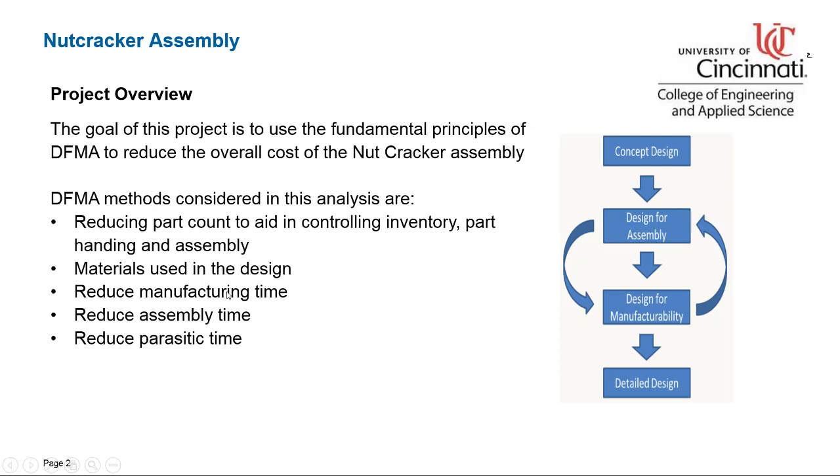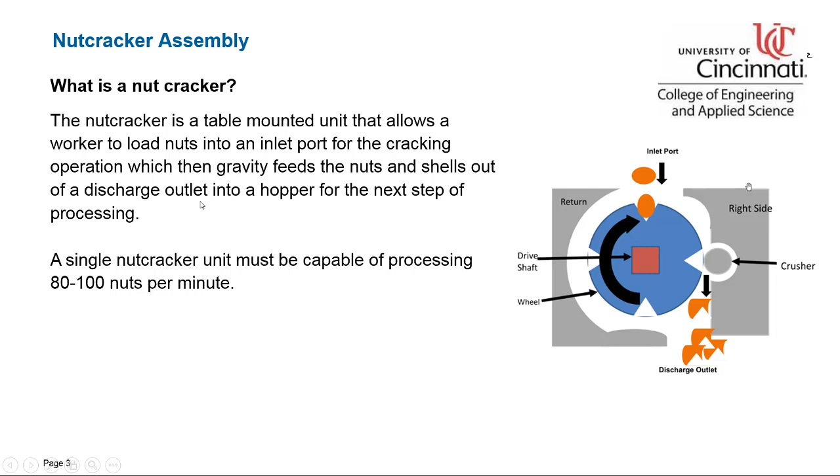What is a nutcracker? The nutcracker unit that I have on the right here basically allows a worker to load nuts into an inlet port. Nuts then get caught inside the crevice of the wheel. It rotates, in this case clockwise, up against a crusher unit, which then cracks the nut, and then the resulting nut and shells are discharged out through the discharge outlet into a receiving bin that then gets further processed. Typical nutcrackers are expected to process 80 to 100 nuts per minute.

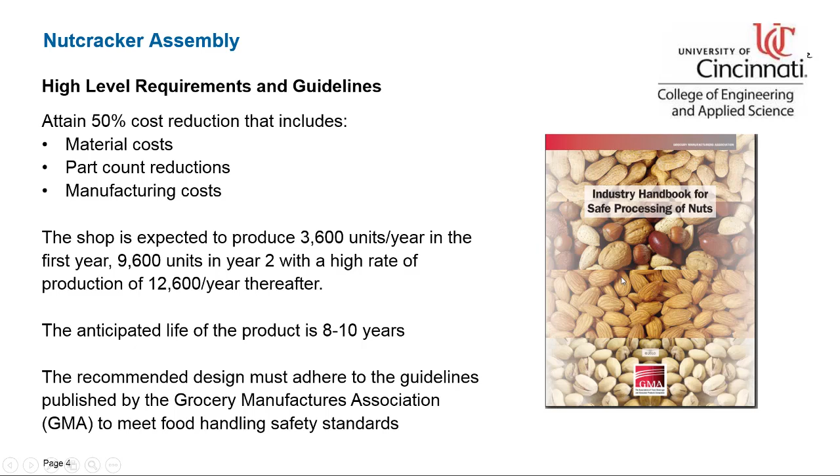Some of the requirements and guidelines that we need to follow for this project: we need to attain a 50% cost reduction. That includes material costs, part count reduction, manufacturing costs, and some associated things that go with those. The shop is expected to produce approximately 3,600 units the first year, 9,600 the second year, and a high rate of production of approximately 12,600 units per year thereafter. The anticipated life cycle of one of these products is 8 to 10 years. Now, the recommended design must adhere to the guidelines published by the Grocery Manufacturers Association to meet food safety handling, and I will touch on that throughout the project.

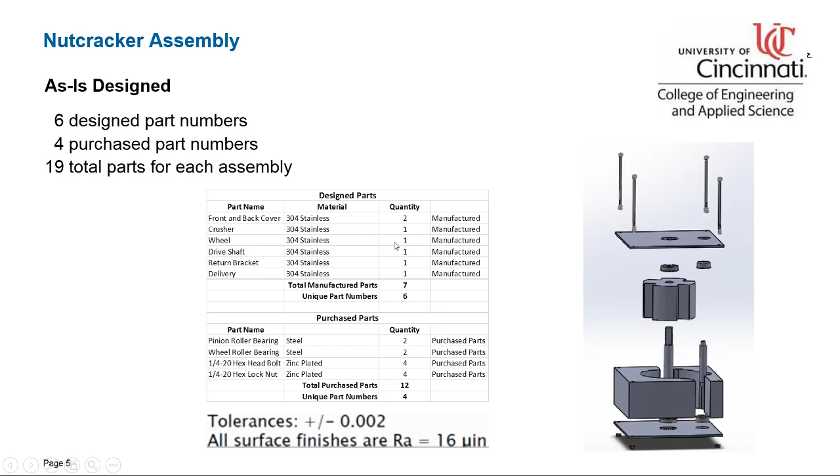Now, there are 2 covers, the front cover and the back cover. They're identical at this point. All of the design materials here are made out of 304 stainless. There are 4 part numbers that are purchase parts. You would have the pinion roller bearing, which is this bearing here and this one here, and this becomes the pinion itself that's manufactured. Then you have the wheel roller bearing at the top and the bottom. Then you have 4 bolts and 4 nuts. Those are all purchase parts. There's a total of 10 unique part numbers and a total of 19 individual parts. Also listed as designed, tolerances are defaulted to 2,000th unless otherwise stated, with surface finishes at 16 microinches.

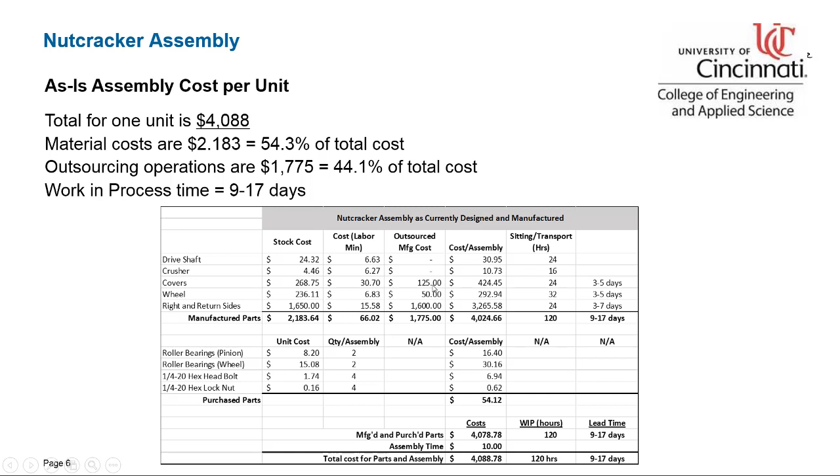Now let's look at the cost per unit. The total cost for one unit is $4,088. That's based off of the actual stock cost, the cost of the labor, which has been estimated through the flow plans, and any outsourcing costs. So you get the total cost of each part for the total assembly. Then you have the purchase parts. It adds up to $4,088. Now, the material cost represents over 50%, which is $2,183. And the outsourcing operations, which are for the covers and the right and return brackets, are $1,775 for 44% of total cost, with a work in process time of 9 to 17 days. That's based on all of the outsourced manufacturing that we have done. So clearly, there's some room for movement along these.

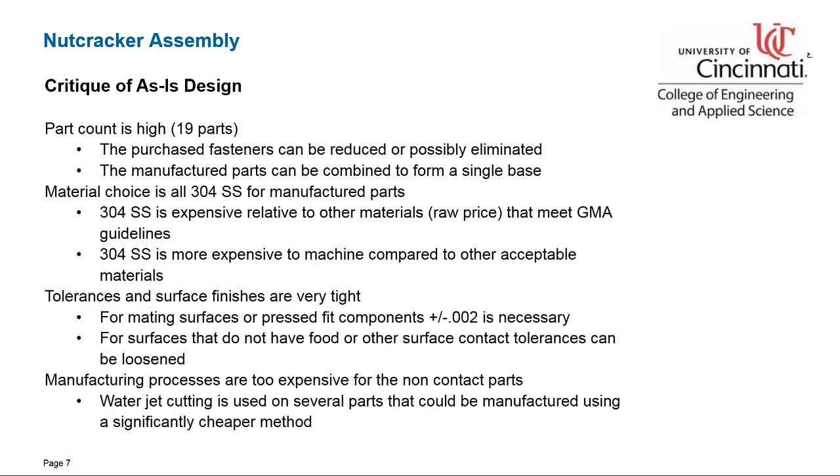Also, manufacturing processes are very expensive. Noted in the process flows, the actual front and back plates and the right and left return are water jet cut, which is a very expensive process that is also expensive when it comes to parasitic time for lead time.

But instead of these being straight from bar stock, then water jet cut, and then all the grinding and milling to get it to these individual pieces, we can actually do a water glass cast on this, and we can drastically reduce the price of this. We'll also reduce the part count by 2, so instead of there being 3 separate part numbers here, we'll have 1 new base plate number.

so we can thumb screw these in. I like this idea temporarily at least because it means I don't need a tool to tighten the nuts and bolts up. I can just thumb screw these in and it takes them out a little bit quicker.

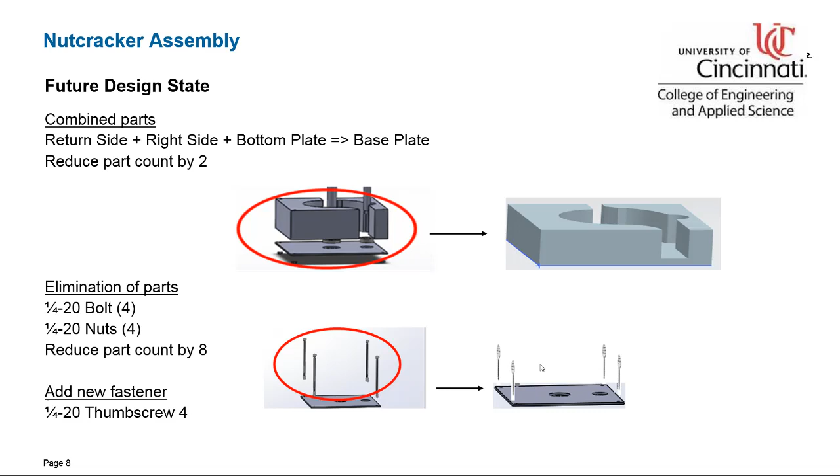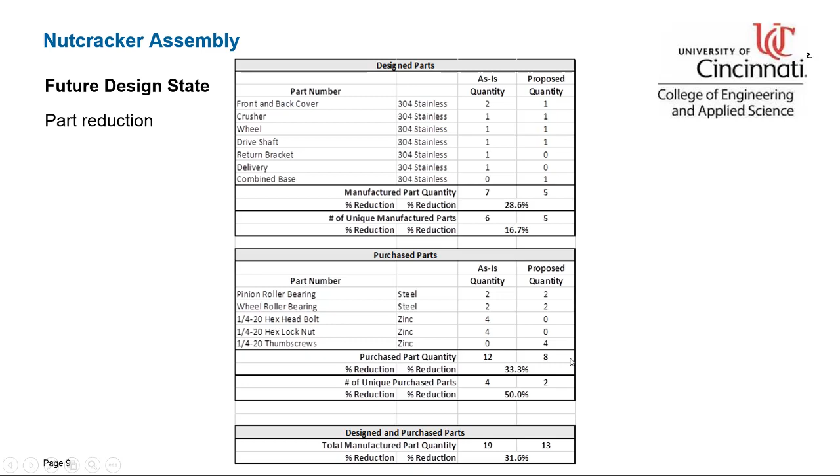On the purchase parts, similar situation. We're going from quantity of 12 purchase parts to 8, 33% reduction. And instead of having 4 unique numbers, we're really just down at this point to 2 unique part numbers. Sorry, that would be a 50% reduction.

The next thing we're going to take a look at is materials. Now, the materials change. This is a little bit of a homework problem. You have to kind of look at a lot of different angles here if you review the GMA guidelines and food safety guidelines. And we can narrow down to the steels, stainless steels, and certainly we could look at aluminum as well. But we look at the 4 candidate steels that I chose, 303, 304, 316, and 430.

And I wanted to kind of do a listing of the Brinell hardness test, manufacturability, and the price. Now, price shouldn't be the only driver. You need to look at a few other things because if manufacturability is very, very poor, then the price per pound is sort of not as big a factor because the machinability is low.

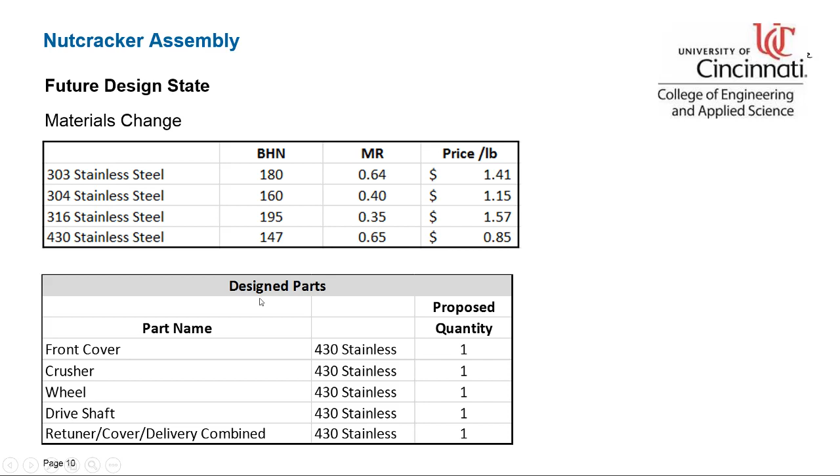After looking at all this, I came to the conclusion that 430 stainless fits GMA guidelines and food safety guidelines. It's got a hardness rating of 147, less than 304, 0.65, a little bit easier to manufacture and work with, and it's significantly cheaper than the 304 stainless. So I think that's the choice to go with initially. So all the design parts, of which there's now 5, we're going to change to 430 stainless.

Now, let's take a look at the manufacturing process. We've combined our parts, we've got our manufacturing parts list, we've got our materials that we've chosen, we know what our quantity is. The next step is I think we have to decide how we're going to manufacture these.

So I think for the crusher, the wheel, and the drive shaft, I don't think it makes sense. These are kind of detailed. There's turning processes on the crusher. The wheel's fairly complicated. The drive shaft has to be turned at a pretty tight tolerance. So I'm going to not change the process for those. But I think on the crusher and the wheel we can actually loosen up the tolerance from 2 thousandths to a hundredth of an inch on each of these, plus or minus.

Now for the front cover and the rear return cover and delivery combined base unit, I guess we'll go with a water glass cast mechanism. So we'll do casting for these. These are per part castings. We don't need to create a die cast for this.

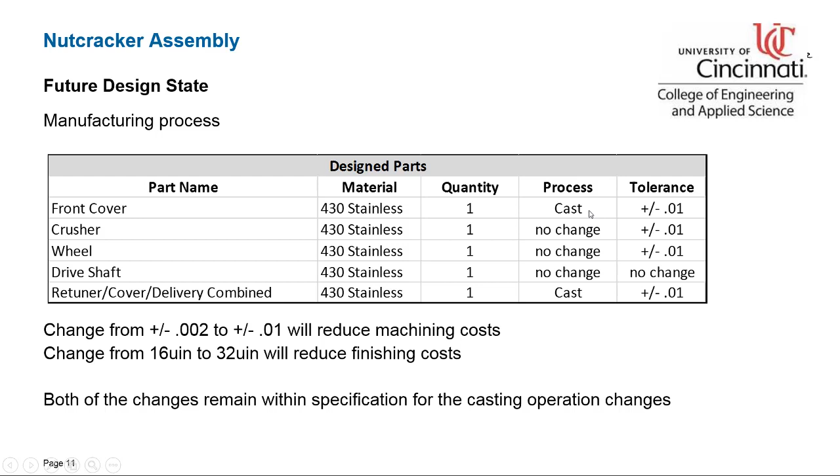And I can cast at a pretty high rate of production. This is a pretty common process, and this casting is really going to drop the cost down quite a bit. So effectively, we're going to go with casting for the front cover and the return cover delivery combined base unit. And we're going to reduce the tolerance from 2,000th to 100th, and we can also change the surface finish from 16 to 32. Again, for this casting process, 32 is perfectly acceptable.

Let's take a look at our cost here. Now that we've decided how we're going to work with this, the total savings for the redesign of the nutcracker assembly is approximately $3,574, which represents a reduction of 87.42%. It also reduces our parasitic time from 9 to 17 days down to 3 to 5 days, taking it down by 6 to 11 days.

This is pretty dramatic. So the unit cost now to produce one of these is approximately $514 per unit. Again, that's an 87% reduction in cost, which certainly meets our high-level requirements.

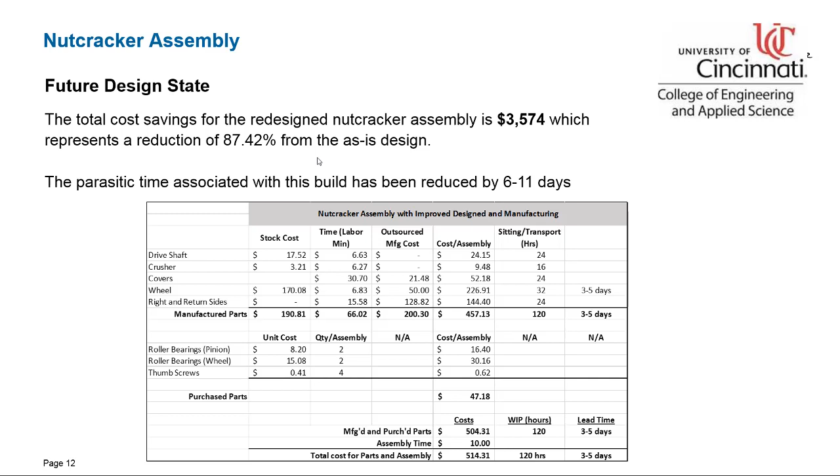I think the next thing we want to look at is changes to the shop floor layout. Since we're not doing so much grinding and milling, I think what we can do is have our incoming parts, the purchased parts and the outsourced parts, come in. They would get held in inventory until they're needed. But I want to open up the shop floor a little bit so that parts could go straight to assembly.

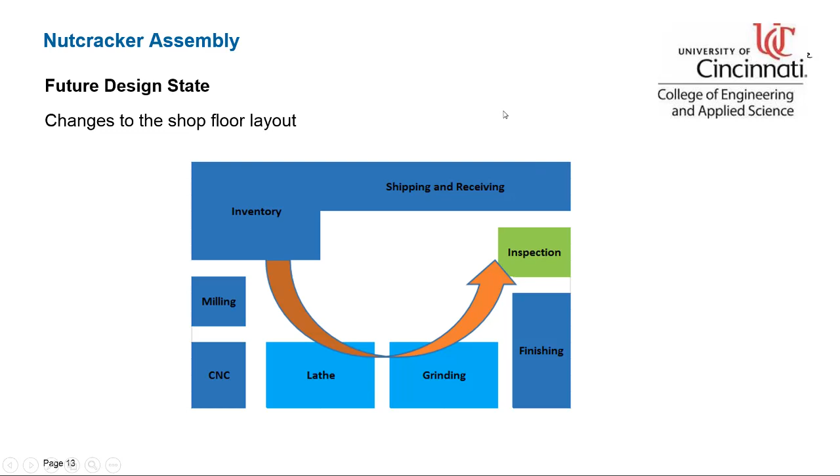Depending on the part, we have a little bit more access. So instead of grinding being the center of the operation, I want this to be more of a single flow type shop floor. Now, having said that, there are a few questions that need to be asked. The first question is, will the nutcracker be used to crush various varieties of nuts? If they say, nope, we're strictly doing walnuts, it's basically the same range of diameter of nut.

If that were the case, we may decide to bring that crusher pin in and make it part of the base unit. That would cut out 2 bearings and eliminate the crushing pin itself, and we could still cast it all in one piece. That, I think, would reduce cost a bit more. It would also eliminate the fact that we have 2 bearings that aren't the same size as the drive shaft bearings. Now, if they say we need to keep that pinion in here for the crusher, I may switch the bearings to the exact same size as the drive shaft bearing, so I could reduce one more part number.

Now, the next question is, do you have flexibility with your workforce for cross-training on different machines? Again, the operations have changed. There's not as much milling and grinding since we're casting these parts. You certainly wouldn't move a machining guy into assembly, but there are other areas, like finishing, and some other things we could use them for.

Also, does the shop floor have any obstructions preventing a more optimized design? I was reluctant to change the shop floor too much. I've been around shop floors a lot. You just can't move things around as easily as you think. There are a lot of obstructions and posts, and there are reasons things are where they are. So I'd like to find out a little bit more about that.